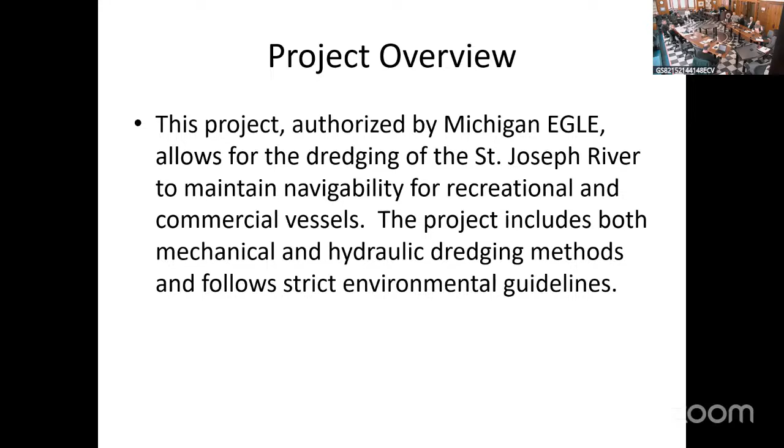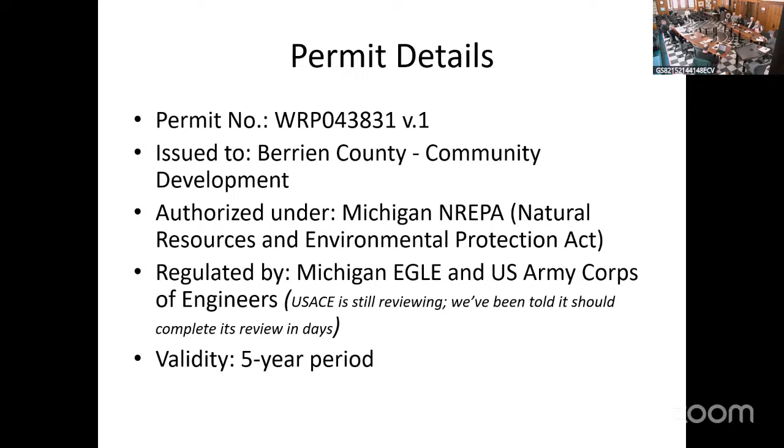It allows for initially dredging up to 65,000 cubic yards of material in the first 2 years of the permit period, and an additional 15,000 cubic yards in years 3, 4, and 5. It's an enormous amount of material that could potentially be removed from the river—over 100,000 yards total. You could fill up a football field 60 feet deep under that standard. It's a huge amount of material that could potentially be taken out, cost permitting, of course.

The two things that have slowed this permit process down a bit are the disposal methods we requested. First is dewatering, where you scoop the material out, place it at designated sites on the shoreline, and let it dry before moving it to its final upland placement. That's the standard method, but it's cumbersome, expensive, and requires handling the material multiple times. The second method we requested is hydraulic dredging, where the material is turned into a slurry and pumped across the pier heads down to Lions Park Beach for beach nourishment there.

That's of course where the Corps of Engineers does their dredging. They stockpile the material down there hydraulically. We've asked for the same method here just because it's so much material that could potentially be taken out of the river. There's no place to store it on shore. We'd run out of room immediately.

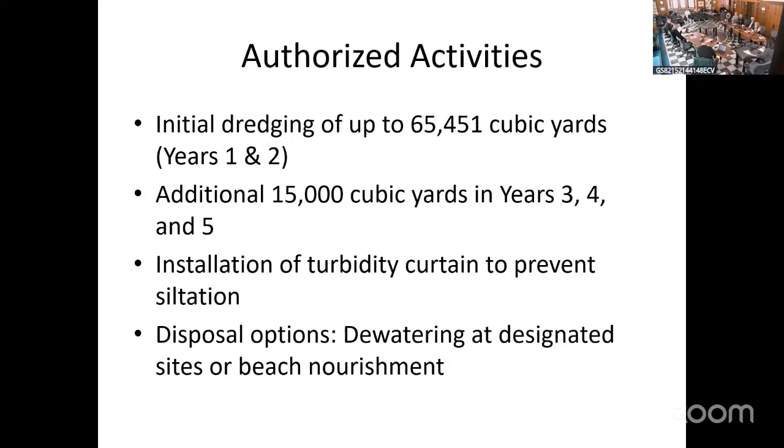One of the other reasons is because we initially just had our engineers design that river dredge drive or roadway portion. But a number of the marinas contacted us and said, hey, if you're going to do this, can you also include areas that would allow us to access that roadway, so to speak. So we had to do additional soil sampling and chemical analysis, and it just took a little bit longer than we expected. Although I should say parenthetically, we're not alone. Everyone doing these projects is taking months and months for them to get permits.

I think Greg can attest to that. I know you guys worked on one for months, right? Yeah.

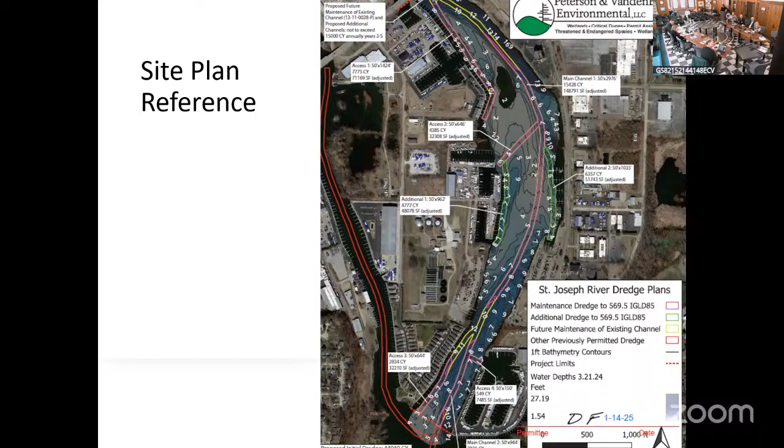Also the Morrison Channel, which is where Pier 33 Marina is, as well as the Harbor Isle Condominium Association at the tip of the island there, will be allowed to have dredging activities all through the Morrison Channel. So essentially, it's just one large dredging project that circles that island, basically.

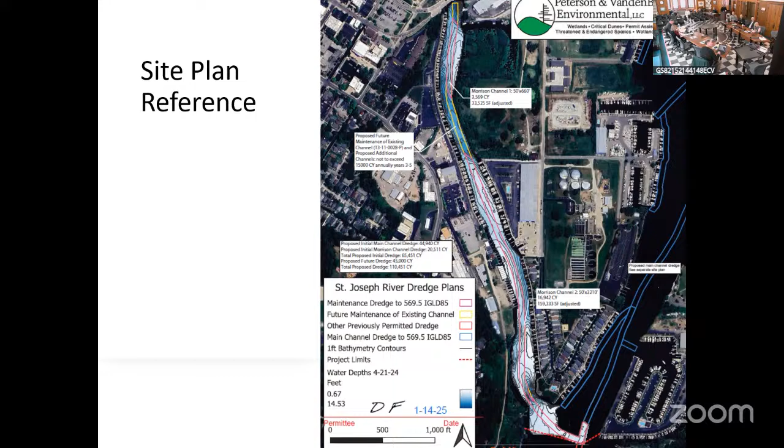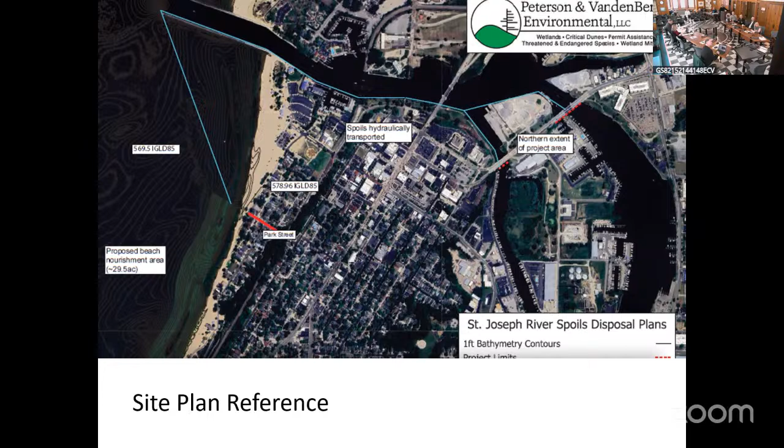This is a reference of where potentially the material could be hydraulically pumped. Again, across the pier heads down to Lions Park Beach, where it could be used for beach nourishment in that area. We're hoping that that's the method that ultimately is used because it's so much cheaper. And then here you see the temporary disposal sites.

I don't think the highlighter works. Maybe I can use the mouse, but no. Nope. Sorry. Oh, here we go.

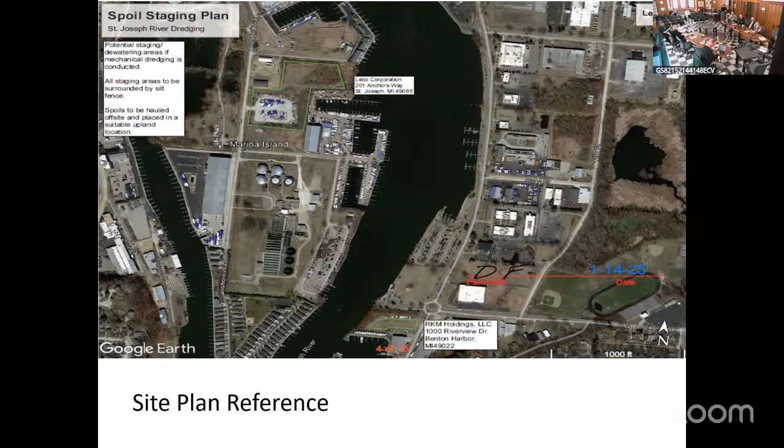Some of the standard requirements within a permit of this nature: you have to comply with the Coastal Zone Management Program, which is that part of what you're talking about today or no? In parallel. Yeah, okay. Completely compatible. You can't perform any dredging from May 1 to June 30th. This is the spawning season where you just can't disturb the bottomlands of the river.

If there is going to be regulated placement of this material, we'd have to get local approval, but John, as you and I were talking about this morning, most of this material can be placed on private property without local regulation.

The one thing that is going to be a hang up is this right here, the mussel survey and potential relocation. This is a new requirement from previous times that we've done this. We never had to do this before, but there is an endangered species of mussels that potentially grows within this area of the river. Before dredging activities take place, you have to do a survey to determine whether or not those are present in the area to be dredged, and if so, how are you going to relocate them? Now, if someone were to do the entire project, the 100,000 yards, they would have to do a mussel survey.

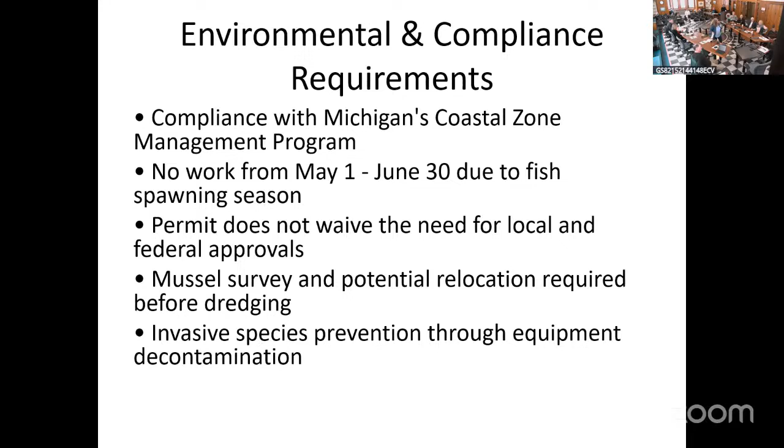What we are going to try to work through in the next few weeks is work with DNR to identify the habitat areas and pre-screen those as not likely to contain mussels, because most of it is just accumulated river sand. Because we're looking at areas that have been previously dredged recently, our expectation is that DNR will waive the full survey requirement in order to do limited dredging this spring. But if we're going to have a huge dredging program in the future, a mussel survey will have to be conducted at some point.

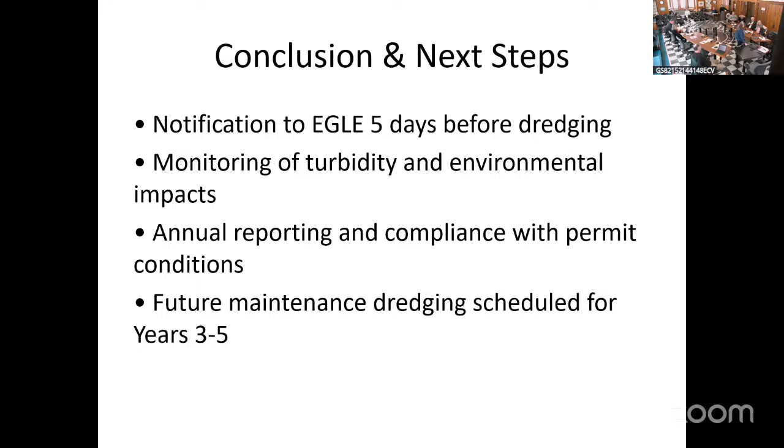So again, we are the permit holder. We're responsible for oversight and compliance. Anyone dredging under this permit, we will have to have our team supervising it, making sure it's done consistent with the permit. And then we have reporting requirements to both the state and federal governments with post-dredge activities. And again, just to reiterate, annual reporting and compliance with permit conditions. We've done this before, and it's really not that complicated for us to do.

So as it stands right now, we expect within a couple of weeks, maybe just a week, we'll have full authorization from both EGLE and the Corps for dredging activities to commence. I've talked to the marina owners and other affected recreational boating community members and let them know that if they want to dredge this spring, they should start preparing for that work. We will work with them to identify the areas where they'd like to dredge and try to get pre-clearance of those areas so that the full mussel survey doesn't have to take place until later on this summer.

In addition to that, I think Brian handed out a news article that just appeared today in the Herald Palladium about Benton Harbor. It appears to be willing to move forward in the creation of a harbor authority. We drafted articles of incorporation for a new harbor authority and gave those articles to St. Joe Township and Benton Harbor last May and said, this is the way to move forward: adopt these articles, create a new authority, use that authority to coordinate dredging activities. Unfortunately, there hasn't been a lot of movement on that until about a month ago. We finally got a meeting together with all the communities and said, look, the need is coming. This river's going to have to be dredged.

The only way to really coordinate it in a long-term capacity is to have a standing permanent body comprised of the community members that can help offset costs, raise money, levy assessments, whatever the case may be. But we've encouraged them. The time is now to create this new authority and get it stood up so that when the demand for dredging begins to occur, there's a body that can help coordinate those activities. So I'm hopeful that the city approves these articles next week. And then I'm also hopeful that St. Joe Township and City of St. Joe will do the same shortly thereafter.

Okay. Thank you. Will there be county commissioners on this board also? No, Commissioner, we drafted the articles specifically so that it was a local only authority. You may recall that we've talked about in the past that the county has offered to provide administrative support and oversight for this authority for a period of up to 3 years to help them get their feet wet, learn what they're doing. I fully anticipate that'll be my department that'll provide that assistance to them. But the idea was, this really is a local issue. It's not a county-wide issue. It deals with a recreational community that's basically comprised of marinas in these 3 communities. So it's their program in a sense to own, but we're there to help them as they do that.

Okay. Thank you. I was on that board. We terminated our harbor authority in, I believe, 2015. And we told the communities at that time it would behoove them to create their own local authority as soon as possible. A lot of things have intervened since 2015, but Dave, I'm hopeful that they do it now and that by summertime you have a functioning authority that can start assisting the boating community.

Commissioner Tyler. Use your mics when you're asking questions, please.

If they don't create their own authority, would the county consider going back and creating it again? The problem with that, there's definitely a need, so here's the reason we got out of it to begin with. Two reasons. First of all, the county has no land use regulatory power in this area. We can't say what can be constructed, where it can be constructed, or how it should be maintained. That's a matter of local zoning. So we have no ability to control what happens along the shoreline.

We were asked to help lead a team to explore a couple of key things. We're all familiar with the shoreline issues and the dredging and the erosion. We were exploring potential new strategies for solving that in a long-term way that gets away from the hardened armoring of the shoreline. That's definitely where everybody is going from a permitting standpoint and environmental conditions. Generally, when we put that armoring up, it has a pretty significant negative effect on the environment and actually causes the need for more armoring and spending more money. So it's actually kind of a negative thing.

The funding was through Michigan EDC in cooperation with the City of St. Joe and Berrien County, Great Lakes Coalition, and Representative Andrews. The team included Dr. Guy Meadows and his team up at Michigan Tech, Mike Morphy at Abonmarche, and Seaworks. All local firms, with the exception of the folks from Michigan Tech, put this together.

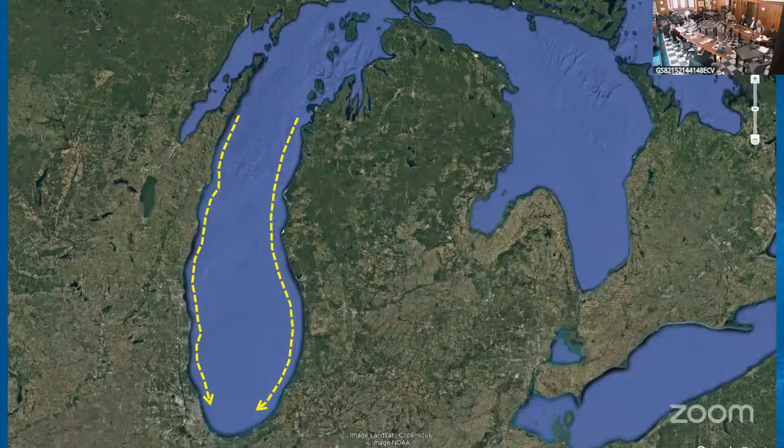The basic introduction of the issue, and you're all generally familiar with a lot of this, is that we have what's called littoral drift, which is sand that moves down the shoreline. That's where our sand comes from. We might walk out on the beach and feel like it's a static thing, but it's really a river of sand that's constantly moving north to south. That's what those yellow lines indicate. At a more local level, the sand comes off of the beach.

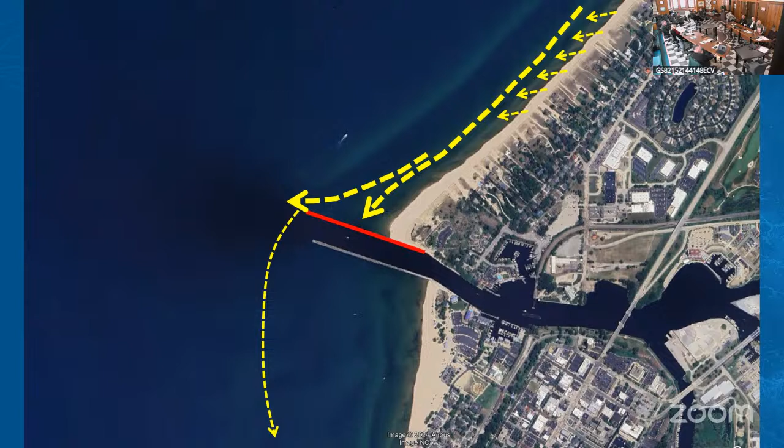As the flow and the currents move down, the sand gets drawn off the shoreline and creates that flow. It will continue south until it hits an obstacle like a navigational pier. That's why, if you look at Google sometime, you'll always see that the beach is bigger on the north side of the navigation structures than on the south side. That accumulation occurs in part because we're blocking that sand. Then that sand gets pushed offshore and a smaller amount continues on to the south. In a natural process, if we hadn't built the structures, that sand would keep on going and keep on nourishing the beach all the way down.

What's happening now is that sand gets pushed offshore and it actually accumulates. There's a thing called the depth of closure. That sand moves in the current, but once the water gets to about 20 feet deep, the sand starts to fall out of the water column and it just ends up on the bottom and we lose it out of the flow that goes south. So the problem is once it's out of that flow, it's kind of lost forever. We don't get it back into that pattern. And that's why we have the sand starvation that you see on the south sides.

So a little bit less happens. And so ultimately it looks like this. You get a lot of sand coming in and you get less sand going down after these structures. So what we're asked to do, and this is a great photo here, this might actually be the video. Oop, guess not.

Sorry, go back here. So what you're seeing in this photo, you can see the North Pier, the very left side there. This isn't exactly true. This is actually a lighter material than the sand we're talking about, but it's a really great visual representation of what's happening with the currents. So this is from a summer day a few years ago. Big winds out of the north, and it just pushes down. You get these currents, and it pushes it out offshore.

So what we want to get to is looking at the options. So the existing shoreline protection strategy we have is to do nothing. We all know what happens when you do nothing. Eventually, either the water goes down like it did in 2013, and we have a sort of a reprieve from the issues, or the water comes up like it did in 2018, 19, 20, and we have huge erosion issues.

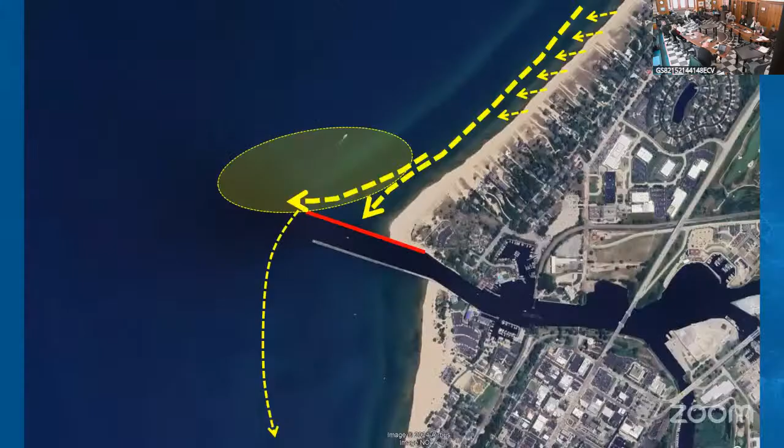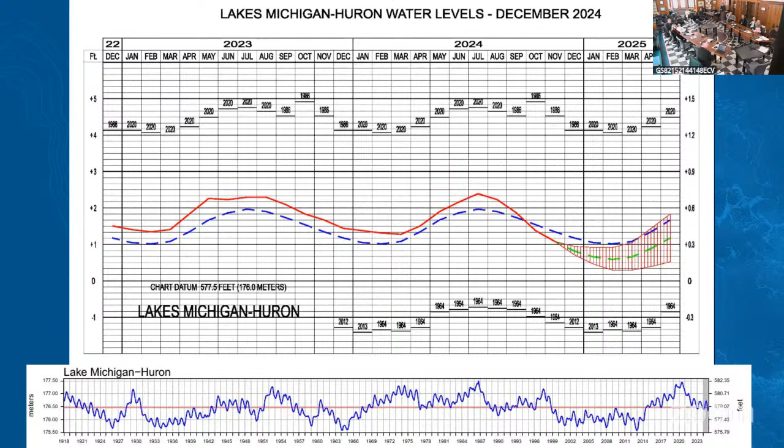So what we want to look at in terms of shoreline armoring, what the permitting agencies and the Corps of Engineers are looking for, is we want to get more to the softer side of things and less of the harder side of things. And there's a lot of advantage to that; this stuff is very expensive and it takes away that sand that would otherwise keep coming down.

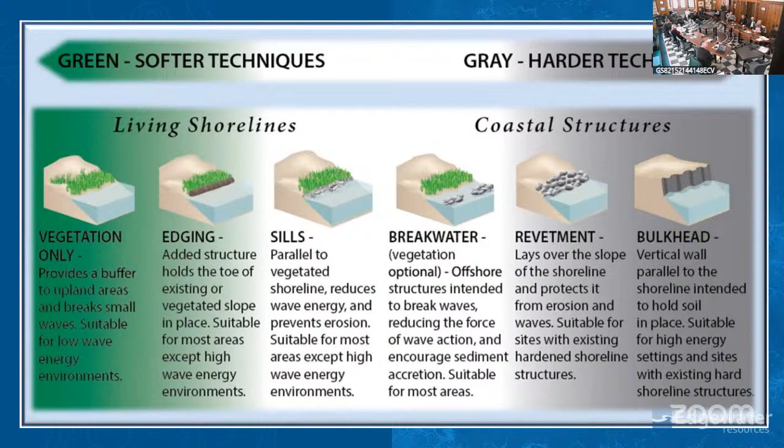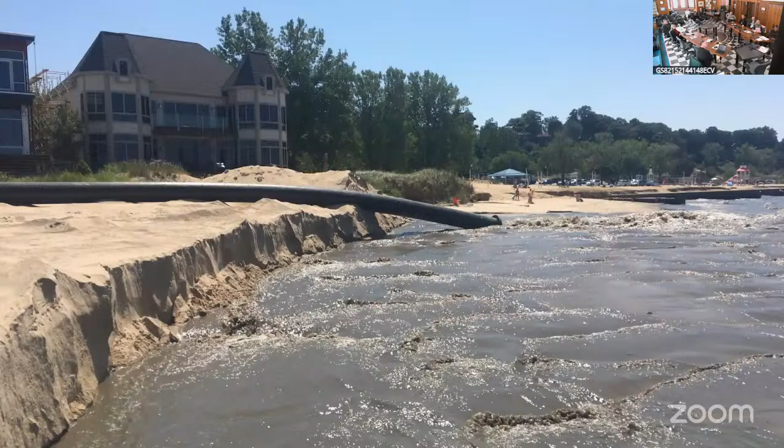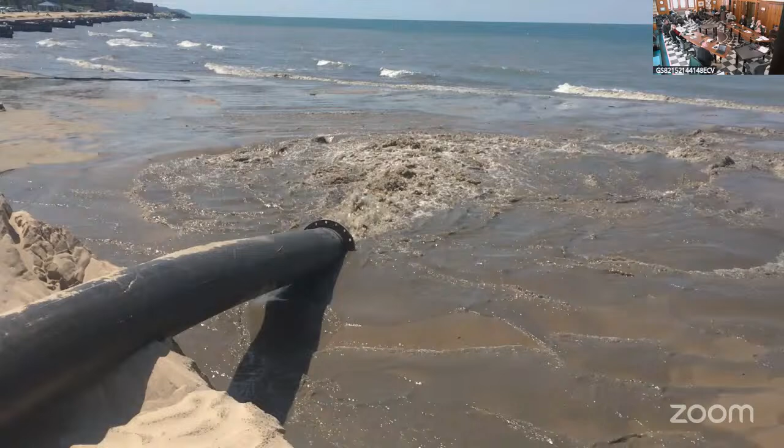So this is what hydraulic dredging looks like. This is what Dan was describing, and it's basically a big pipe sucking 90% water and 10% material up, and it pushes it on the beach. And it's a very effective strategy, and it's very cost effective. And this is what it looks like right there at the north end of Lions Park Beach, and they spread the sand out. So that's a positive thing, and that's exactly the strategy Dan was describing. This is exactly what it would look like and how it would happen. And when that works, it's great.

Here we go. We actually have the video. Sorry, it's moving a little slowly there. So

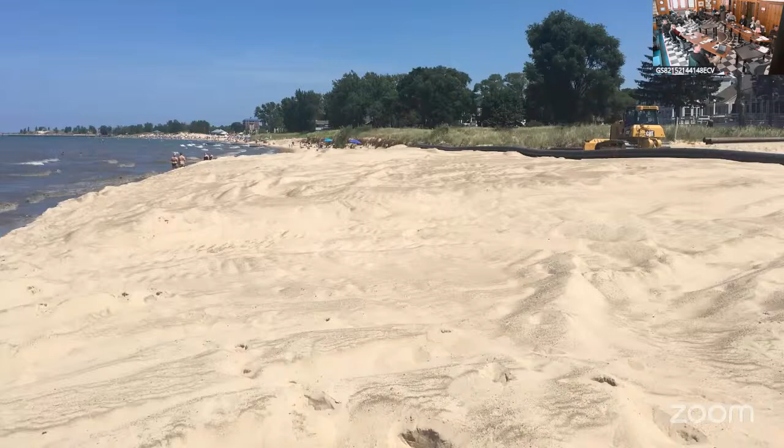There's nothing wrong with this strategy. Particularly, we always make sure that it's clean material, that there's no heavy metals or contaminants in there, that sort of thing. So what's the challenge with beach nourishment? It can be expensive if you're importing sand. If you're moving it through hydraulic means, it's actually about $10 to $12 a cubic yard. Very, very affordable. If you're trying to import, it's maybe 5, 6, 10 times that price. So we don't do it that way.

There's an inconsistent federal funding schedule, and it's relatively short-lived. It only lasts for a year or two, just depending on weather. It is a very good solution. It's the natural process that would have occurred.

What's wrong with the armoring? It's very, very expensive. It impacts neighboring properties. Just mobilizing the equipment is a huge challenge. Most importantly, once I armor that shore, I can't pull sand from that shore into the drift pattern anymore. And that gives me less sand downstream and creates more issues downstream. So we're spending a bunch of money to armor a shore, which then makes it more likely that the properties downstream have to armor.

And once one person puts in armoring, if the neighbor doesn't, we get what we call flanking, and it causes erosion around it, which is exactly why the city of St. Joe wrote their ordinance to prevent additional armoring in certain places and to pull properties back so you don't need to armor. It's the right strategy. Once you armor, you're permanently spending money on that forever. So we really don't want to do that.

So what to do? What are the options? Of course, we used to have tons of ice. When we have a lot of ice in the wintertime, it actually protects the shoreline from waves. We're getting less and less ice, so we're getting more erosion. So kind of skip past this a second here. So more rapidly changing water levels with climate change, more storm intensity, more frequency, a little bit less ice cover leaves shorelines more exposed, and it's all less predictable.

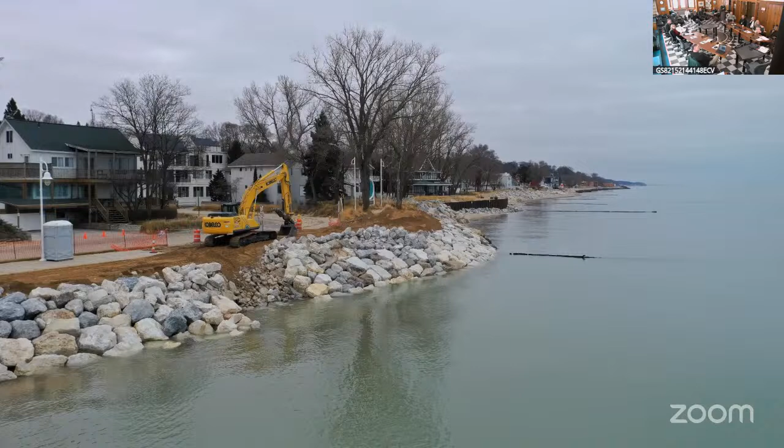This is the shoreline project Brian mentioned at the south end of Silver Beach. Right now, if you were to go out there, that's probably 50, 60 yards from the lake edge. That's not a strategy we would like to do. We prefer to do, sorry. But in some cases, that's the only thing that's available because we have no space and we have to protect the infrastructure.

Lions Park Beach, of course, we're all familiar with the steel that's there. Certainly not an ideal kind of a beach environment. It's there, of course, because we're not getting enough sand. We have to protect the water plant and all those things. What we're trying to get to is what can you do besides these strategies, so we have a softer beach. And the answer to that is looking at more nourishment, but finding a cheaper location, a cheaper source.

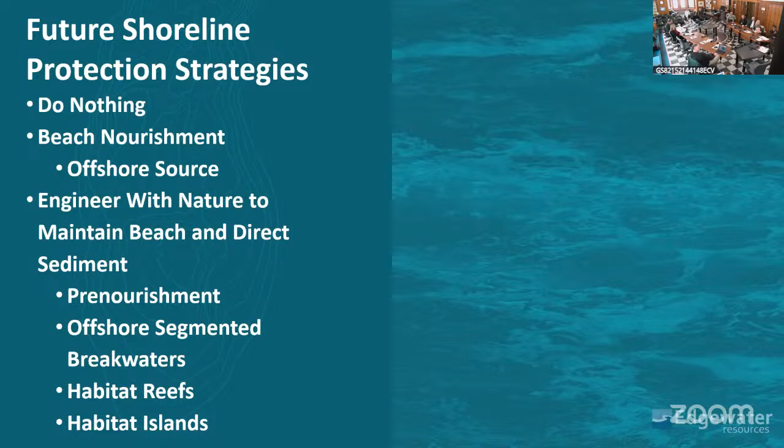One of those sand sources is that sand I described earlier that gets pushed off the beach and drops on the lake bed. It's still sitting there. In Florida and other states, they grab that sand and put it back on the beach. The Corps of Engineers used to do this until they lost funding in the 90s to do the bypassing. The other idea, once we've done that, is how do you keep it there so it doesn't keep flowing downstream? So we'll look at some new strategies.

You're used to seeing big, long, continuous breakwaters. The strategy we're moving towards now is what we call segmented breakwaters or detached breakwaters. This is a project my partner designed down on the Intracoastal Waterway. All of these provide equivalent protection as a continuous breakwater, but it also creates a lot of habitat features and allows better water circulation, so better water quality. We're not creating stagnation on the beach that could cause issues, and it's also just as effective in terms of wave protection.

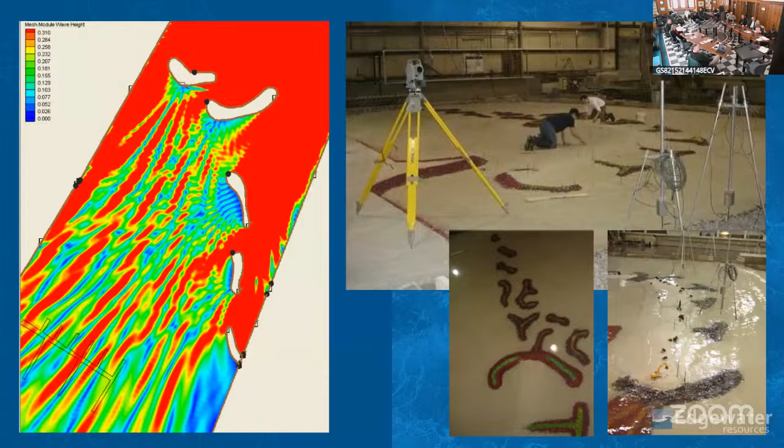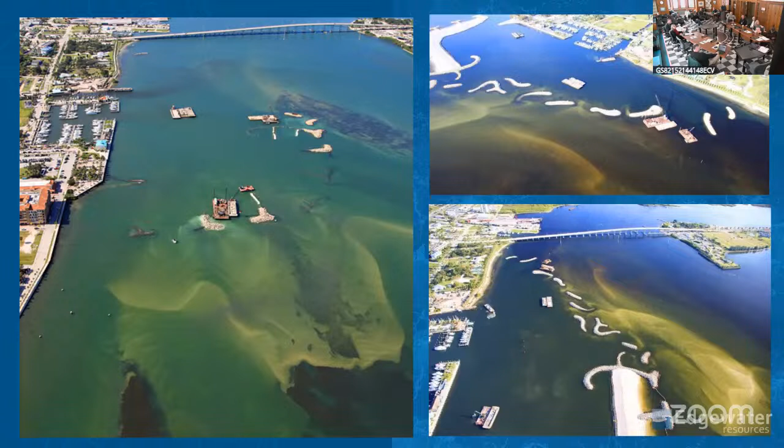So we can actually model this in the computer. Our team can do all this work in the computer, and then sometimes we do physical modeling to prove it out. What you can see here is that marina, and the sediment just rolls right through. Once it's built, you can see the sediment is directed around. Okay, so that makes sense. What's cool about that is this is all...

So no mechanical equipment like that, just navigational structures that can help direct that sand back to the beach and protect it. It's important to know the sand will never actually reach out to these structures. We're not just simply moving the armoring out and having the beach fill into it. The physics is such that we can actually define exactly where the sand will end up, and that beach will eventually fill back to about this area. Once that reaches equilibrium, the sand just continues on by.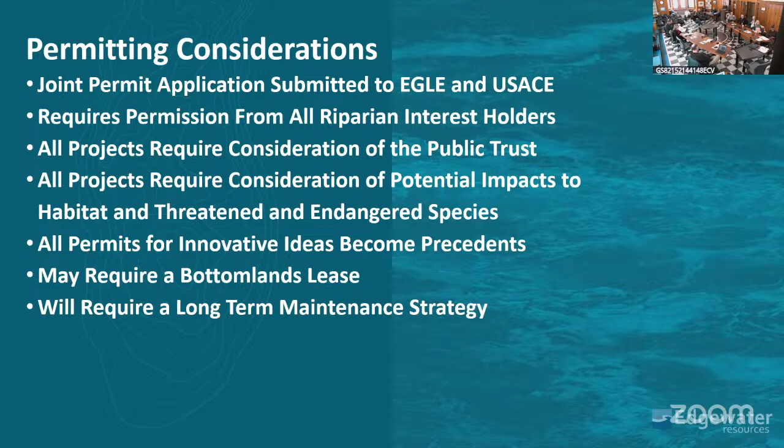We do the same thing as to where the sand might go, and we've documented those things. Ultimately, working with EGLE, we've proven that this can be done and permitted because we're not going to have these negative impacts.

So they asked us to develop concept alternatives. We did a preliminary application meeting with them to discuss it. Moving forward, if this does move forward, we would do the preliminary engineering and actually submit the permit application to EGLE and the Corps, which is exactly the same process Dan just went through.

To do that work, we collected bathymetry, which is basically topography, but under the water, so we know where the water is. We collected sediment samples, did photography, analyzed the wave climate and the quality of materials for beach nourishment. All of these things worked out well in terms of supporting the goal.

This is the bathymetry, so now we know exactly what the water depths are in various locations. And by the way, we know where the water plant intake is, and we're nowhere near that. Dr. Meadows and the Michigan Tech team put that torpedo-looking thing underwater.

It's actually an underwater AUV with photography, and those bands you see are transects where we took all photos. We showed this to EGLE and said, we can show you that the sand is sitting here. We took photography to show it, and looking at it with the fisheries folks, they agreed that's clearly not habitat.

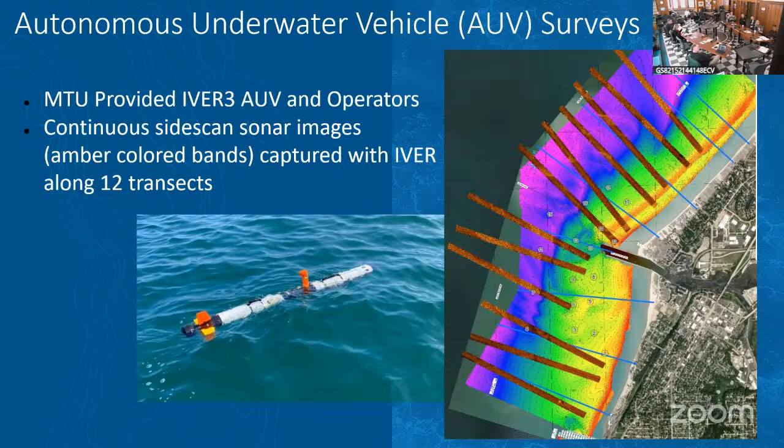So that was the purpose of these exercises: to show that the sand is there and that it's not a habitat concern.

And then we did the wave climate studies. These are called wind roses, and what you're seeing is that the farther out it goes, the more intense it is, and the frequency. So that's a measure of intensity and frequency.

Clearly we're not so worried about this angle. We are worried about that angle, for example, and we're less worried about the due west. Imagine this is a spot on the beach, and this is where the biggest waves come from. That all makes sense with our prevailing wind and wave conditions.

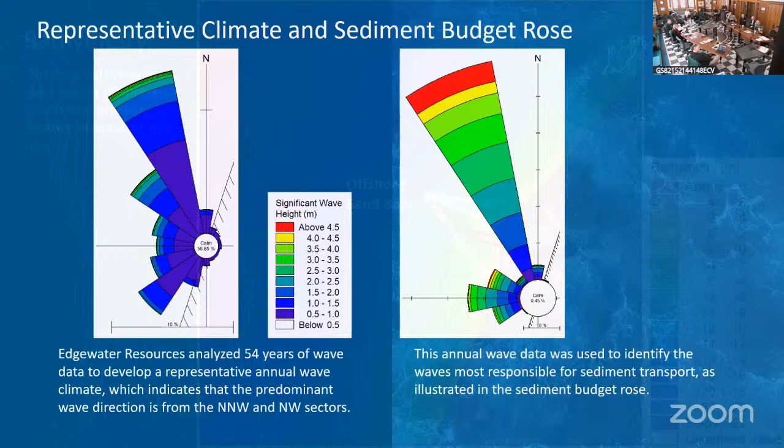So we studied those and then came up with, okay, where are the sandbars? Can we move that sand from up off the piers and do beach nourishment on Lions Park and in this area? And if we were to look at adding potentially, we could just do one thing: grab the sand from up here and do nothing else but nourishment here.

That would last for a year or two every time we did it. It's the cheapest possible source. The question and issue then would be a continuing source of funding to do that, and we don't have that continuous source of funding.

So this strategy says, do that nourishment or do Dan's project and move it to that beach, pre-nourish, and then do whatever structures might help keep that nourishment in place. Those different colored lines tell us where the beach will be in various numbers of years. So this is both protecting what's there and also directing some sand to accumulate on the beach.

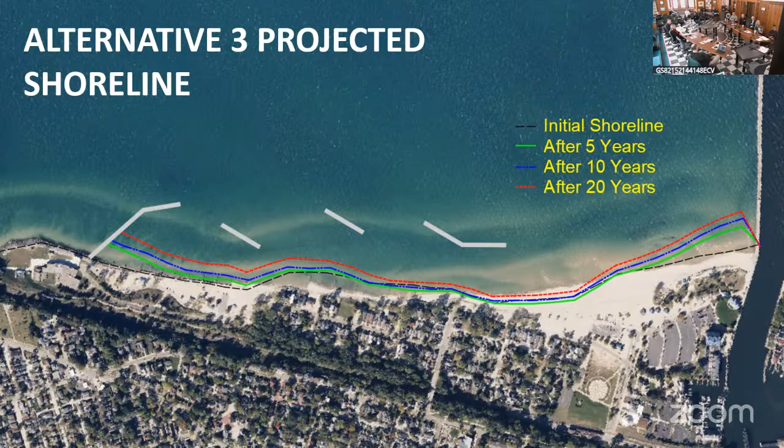That was one concept we looked at. This is another one with less structure, and we did a third one. We've explored these different strategies and determined that they're feasible, that they would function properly, and that they wouldn't have a significant negative impact. There'd be a tremendous amount more engineering to be done if this were to move forward, but this is the general principle of the process.

So hopefully in the future, we'd be able to have this out here and not have all of that steel there. We'd have more of a soft shoreline, better habitat for everything. So that's the strategy—about a year's worth of work in about 15 minutes. We'll entertain questions.

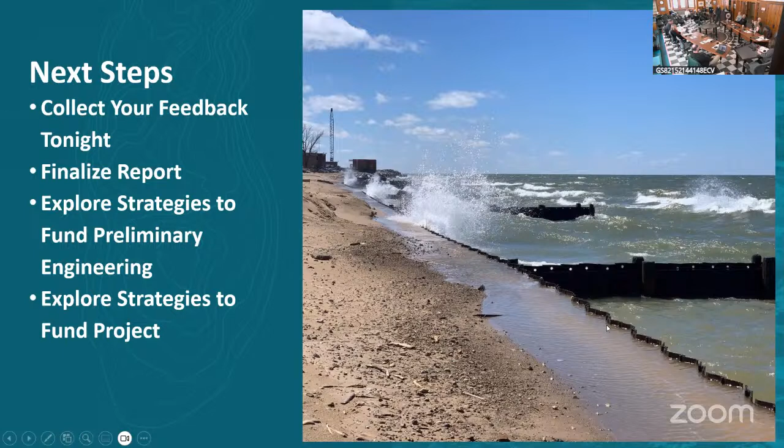What is the cost of those kinds of structures, and is there grant funding with EGLE or anything like that to cover any of those costs?

Sure, we're not far enough down the path to do accurate cost estimates. That one you saw in Fort Pierce around the marina, everything including that big green island, was about $19 million. So we would need to do a lot of engineering in terms of exact depths and volume of stone to give you an accurate estimate.

In terms of grant funding, certainly this is a strategy from a coastal zone management perspective. Everybody—the Corps, EGLE, everyone else—is looking for an alternate strategy from hardening the shoreline, so we'd be optimistic we'd be able to get some funding.